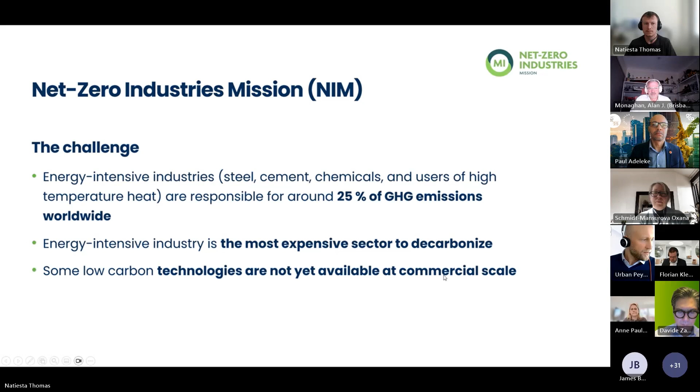One of our main goals is probably better visible on the next slide. If you could move to the next slide, Thomas. You see a summary of our mission goals, but I think what it sums up is that our goal is to build trust in new technologies, and webinars like these are meant to help build that trust.

Our goal, as you can see, is to implement 50 large-scale demos across all energy-intensive industry sectors and along different technology pathways. We support fast-track development of breakthrough low-emission technologies to higher TRLs, and ideally, we help reduce capex on low-emission innovation technologies by over 15%, and that already in the near future.

Today's session will explore the latest developments in net zero cement, highlighting cutting-edge technologies and industry best practices. As Alan has already pointed out, we have an exciting lineup of experts who will share insights into how we can collectively drive sustainable change in the cement sector.

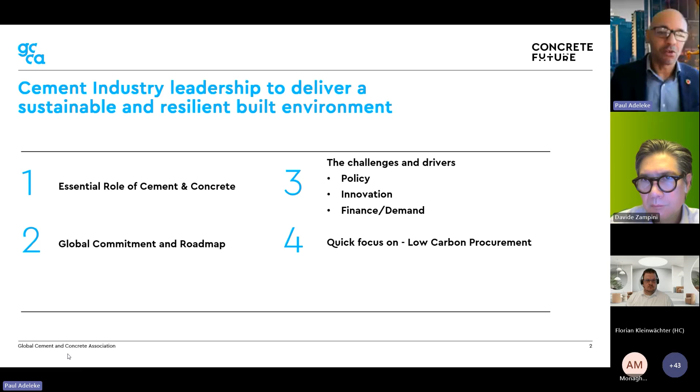So if you don't know about the GCCA, we're a member company organisation, and our members, who manufacture cement and some of them also concrete, operate in just about every country across the planet. It's very much a local product, cement and indeed concrete. You can see all our members there - we have about 50 of them - but we also have a number of association partners: national associations, regional associations, who also work with us hand in glove in driving our messages, working with partners and communities to ensure we can collectively build our vision.

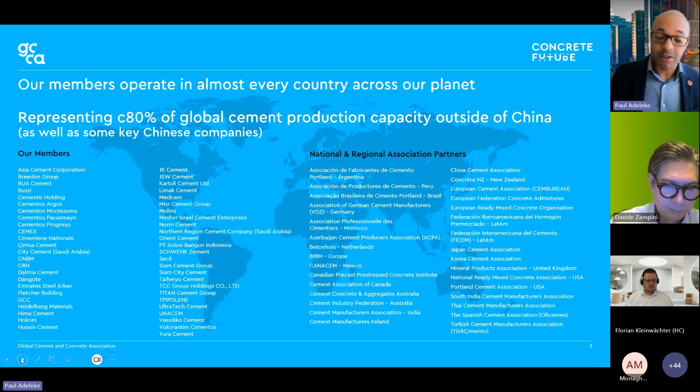We represent around 80% of global cement production outside of China, but an increasing number of China members are also joining the GCCA, which is hugely important. China, you will know, produces more than 50% of both cement and concrete in the world, so it's absolutely crucial that that is part of our mission to decarbonize.

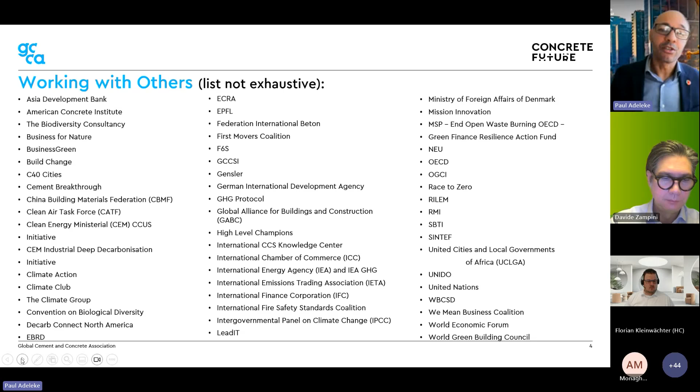We work with many different organizations. Please, if you're not on this list and you do work with us, I apologize. If you're not on this list and you want to work with us, do drop a note. The GCCA exists to partner with organizations - we cannot achieve our net zero mission alone. We need policy, we need finance, we need the built environment, the full value chain playing its role to help us. So that is our job: to collaborate and work with a whole heap of different organizations.

So, the essential role of - when I talk of concrete, I obviously mean cement as well.

There is a balance, why is it a problem? Why could we not just not use cement and concrete? Well, actually, no, we couldn't. We need it for society, for transport, for the hospitals, for the schools that we build, for the houses that we live in, for the offices that we work in. It is a local product. There is nothing with the level of strength, durability, cheapness, versatility to be able to construct. But of course, it comes with a level of impacts.

The whole built environment and construction is around 40% of CO2 emissions, and within that, building materials around 11%. And the figure we use for cement and concrete is something around 7% of CO2 emissions come from cement and concrete.

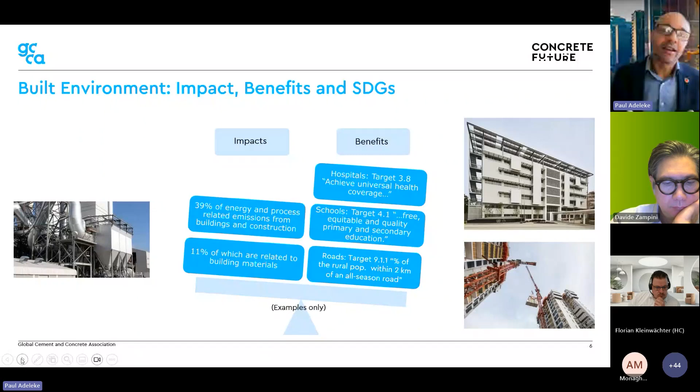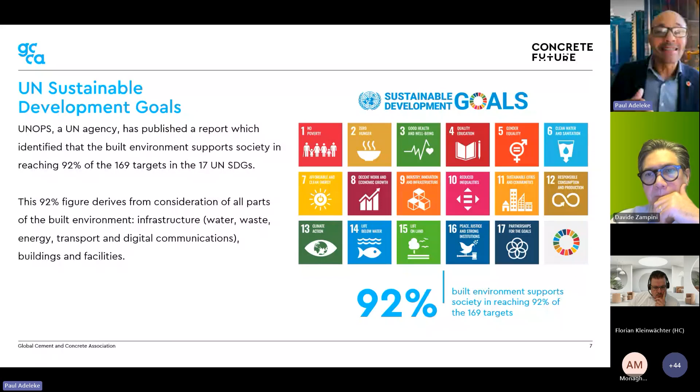But it's that duty that we think our members have, because we deliver this essential material, that we need to decarbonize it. And we're even massively critical for the SDGs, the 17 United Nations SDGs. The estimate figure is that 92% of them need built environment support to deliver them. And the analysis we've done suggests that actually cement and concrete are vital for around half of all the work within each of the SDGs.

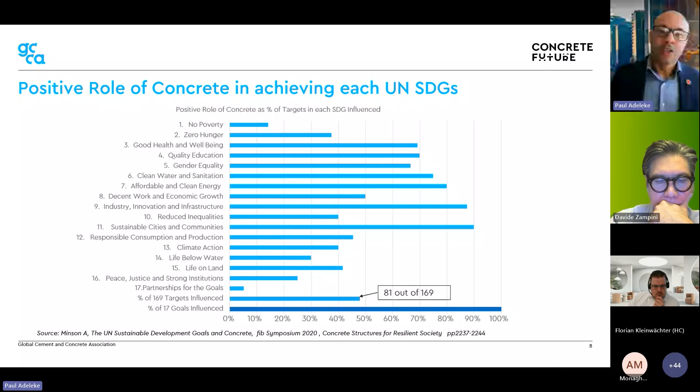But we have to build smarter. We know that as well. We have to be able to recycle our products. We have to encourage architects to use our products with a more minimalistic approach. We have to be able to recycle and reuse the buildings and then the materials that we need. But there's this call to action to our industry from all the stakeholders.

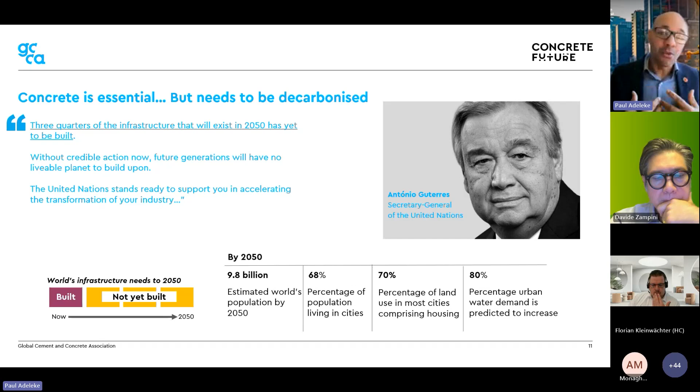And that is why in 2021, our member companies and the industry under the GCCA came together to make this global commitment, to set out a credible pathway to get to net zero. And I believe we're the first global industry to do that.

Now, it's not that work wasn't done to drive down emissions over the previous years. We've said that initial progress from 1990, when we started to monitor CO2 and transparently report it - we're again one of the first industries to do that of our manufacturing. You can look on our website to see that every year we report those figures to show that there was indeed improvements in reduction of CO2 emissions.

But we think that this decade ahead is a crucial decade to deliver, where we have to accelerate those reductions, but also set ourselves up for the end of the decade, where some of the more transformational technologies will come on tap to really drive the reductions forward.

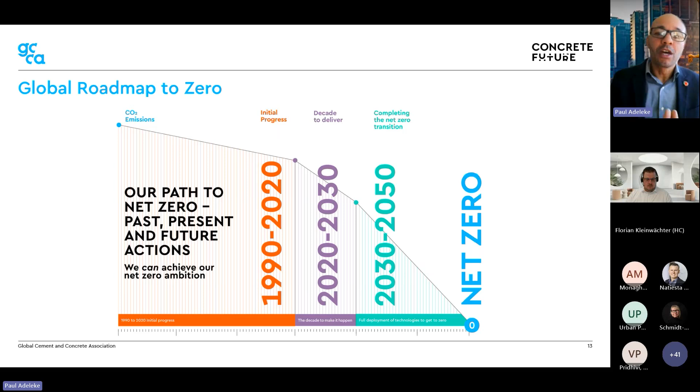At commercial level, carbon capture will start to really come on stream and ramp up towards the end of the decade. It's important to know that the very first at-scale carbon capture cement plant will be live and operational this year, which I think is a really important moment for our sector - the first plant will be making net zero cement.

We've got milestones up to 2030. So by 2030, we want to get to a 20% reduction, 20% in cement, 25% in concrete, and 10 plants that are up and running at scale.

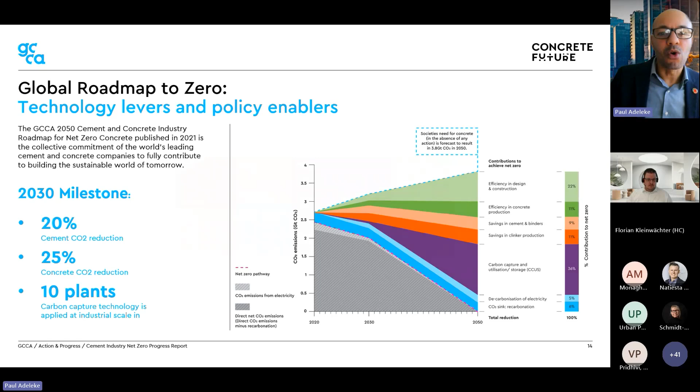We think we're confident that we'll deliver 10 plants and more. I'll leave this slide in so it's a more comprehensive run through of each of the technologies and levers and what each means, but for time I won't go through it.

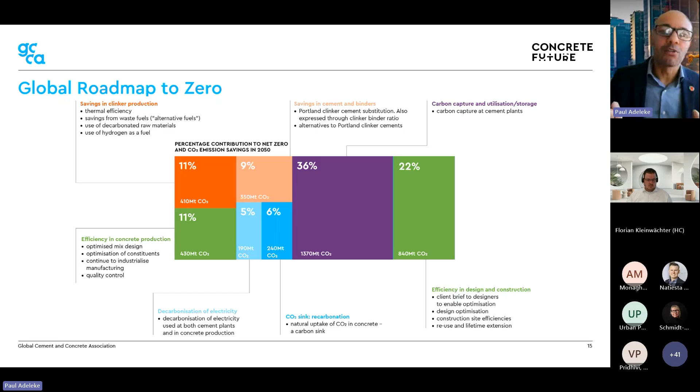Not only is the GCCA involved in the global roadmap, but we also help deliver national roadmaps. We work with a number of national associations, partnering with governments to deliver roadmaps and commitments at a national or regional level. Our ambition is that the whole globe is covered, and we're trying to get to 75% of the globe by the end of the year.

We're making progress, because China have made a commitment to deliver a roadmap, and we're working with the Chinese industry there. The India roadmap is almost complete and ready to be published. Both of those countries have big populations and are big and critical for cement and concrete production.

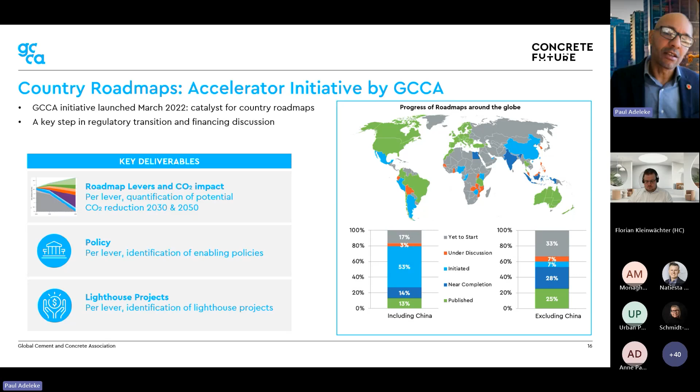We also need to make sure the Global South and Africa plays its role, because it's the Global South where the majority of cement and concrete production is being produced, and even more so as we move through the decades ahead. So it's fundamental that each country does its homework with its national government, and that's what we're moving towards.

In terms of moving forward, we think the key drivers are around policy - the enabling policy frameworks we need to get tangible change - but also the technology and innovation drivers, as well as making sure there is demand for lower carbon cement and concrete.

There's no question that our member companies operating across the world are making progress. Our action and progress report, which you can download, is jam-packed with case studies across all the different technologies, showing a handful of the key work that's been done. I do suggest you download it. We transparently report on that every year.

As we get to the halfway mark of this decade, which we're calling the decade to deliver, we need to accelerate that. So to complement the action and progress on the ground with our member companies, we think greater progress could be achieved with policy support to underpin the transition, driving innovation and technologies, and unlocking the critical demand for low carbon procurement.

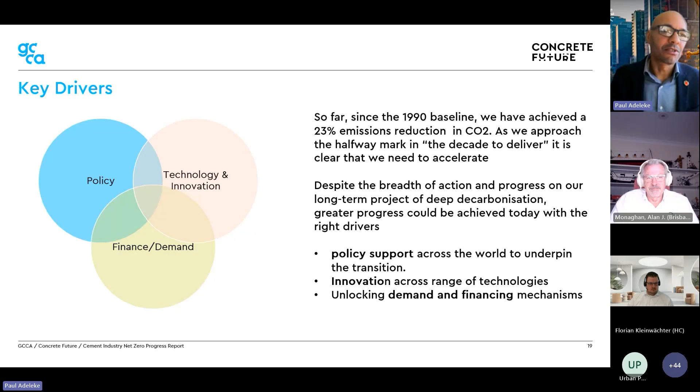For example, if we look at waste treatment, our kilns can take societal waste and recover energy from it, reducing our fossil fuel use. It's a win-win for society - we're taking waste that cannot otherwise be recycled and using it for both energy and within the cement product itself. Some plants are operating at nearly 100% alternative fuels, but we need regulation to allow and deliver that.

We also work with blended lower carbon cements. We're going to need a regulatory base for carbon capture, recognition of carbon removals, and public financing to support that, as well as licensing and building the transport and storage infrastructure.

Ultimately for carbon pricing, we need to put a price on carbon to make sure our member companies can deliver the investment and know they'll retrieve that back. Whilst we advocate for carbon pricing, we need to make sure there is no leakage within that country or region that can distort competition, so that investments can be made with certainty and confidence.

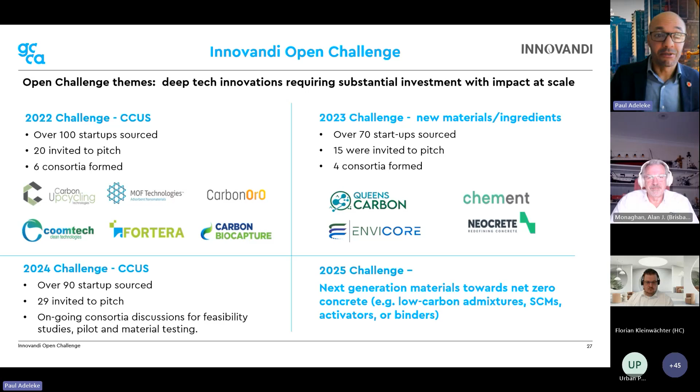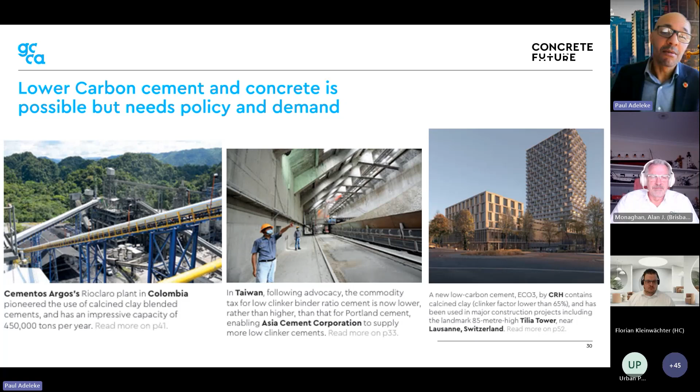And more so, it needs demand. It needs government and private buyers to demand lower carbon products, so that it's actually produced by our members, and they're incentivized to produce and deliver that.

But it means we need tools to be able to measure what is lower carbon cement and concrete. So the GCCA provides an environmental product declaration so that cement, concrete, aggregates, and precast products can be measured, with third-party verification, which really implies deep data collection—an absolutely critical building block.

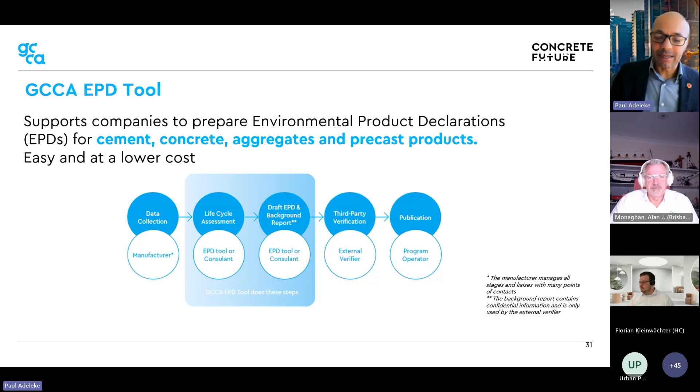Beyond that, to underpin the whole procurement system we're trying to build, you need governmental targets, you need baselines set for every country, and also a definition system which defines what is lower carbon cement and concrete, providing a level of comparison so that those procuring can make informed choices.

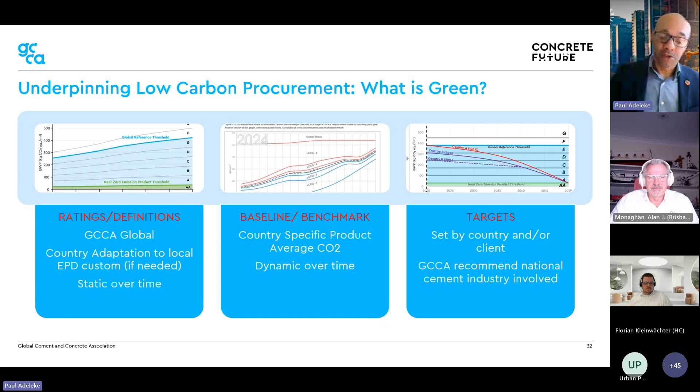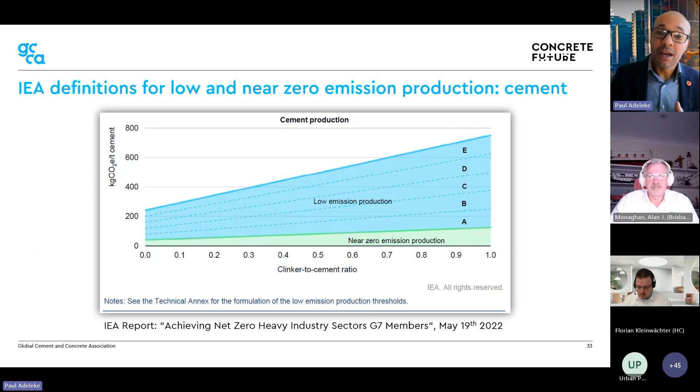The IEA very helpfully provided the definitions for low and near zero emissions cement, and the GCCA has used that as a baseline to produce cement ratings and also concrete ratings.

So we are launching our rating system in April, whereby procurers will be able to ascertain and mark which level of carbon rating is attached to each of the products that they buy. If you want to know more about that, we have a webinar ourselves in March. Just jump on our website and you'll be able to find and hear a little bit more about that. It's a fundamental thing, trying to drive the demand.

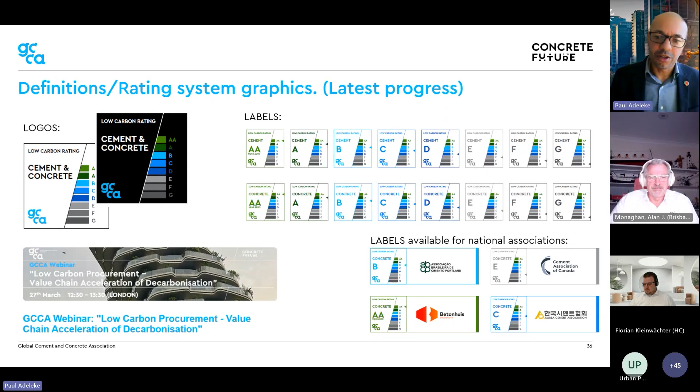One of the things that the GCCA does every year is get together all our CEOs and our member companies and leaders, but also this year we're inviting the wider value chain, the wider built environment and policy makers to join us for our conference in June in Mexico City. If you have the opportunity to do that, for a really deep dive and dialogue on how we can progress this work together, would be very grateful.

I'll stop there. I know the slides are going to be shared. Glad to take questions, and thank you.

Thank you for that, Paul. I never actually fail to be impressed with the work of the GCCA. They are an absolute pillar in our industry.

We don't have a lot of time for questions. You did go a little bit over time, but I will ask one as my prerogative as moderator today. This is obviously cement, an incredibly hard to abate industry. So in your opinion, is full decarbonisation really achievable?

It's a very good question. You know, we used to be impossible to abate, hard to abate. We're complex to abate, no question. You've seen that, you've seen the levers. You know that it's not just around the energy, but it's around the processing emissions. We're possible to abate, definitely, but also we're essential to abate because of our necessity to society.

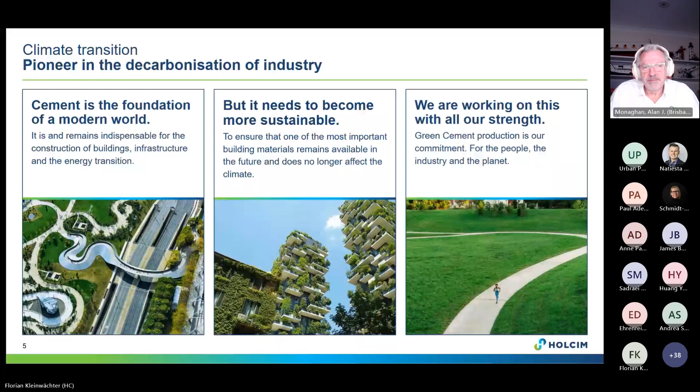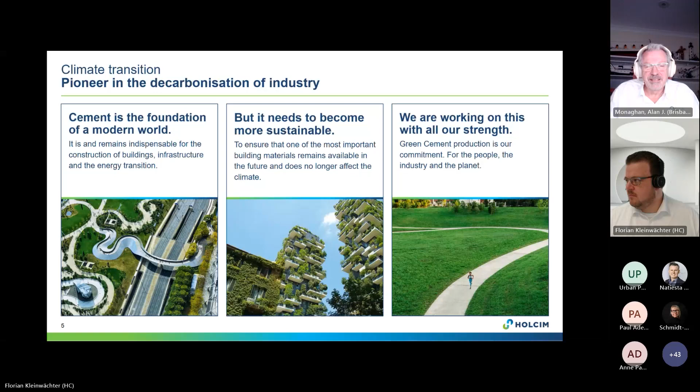Can you hear me? Yes, we can hear you. Florian seems to be having some small technical difficulties there - just give him a second. Florian, are you back? Unfortunately, we cannot always guarantee that we don't have technical difficulties. Florian, we can see you and we can see your slides. Maybe move to the next presentation and come back to Florian. Florian is still on camera though, if you can hear us. He has jumped off - oh, apologies, we will come back to Florian's presentation and questions you will have.

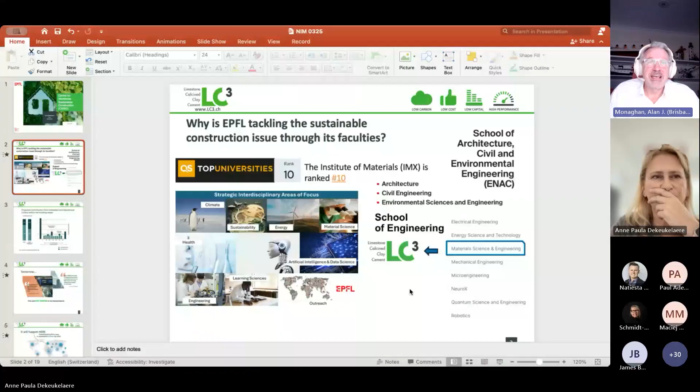Yes, thank you. Thank you so much, and thank you for the invitation. I will walk you through a new cement, the LC3, but let's begin. Do you see well on my screen, correct? Absolutely, yes. Okay, thank you.

So first of all, before talking about LC3, I'll just quickly talk about the university, who we are. We are EPFL, the Polytechnic Federal University of Switzerland in Lausanne. Within the university we have three faculties: architecture, civil engineering, and environmental engineering. So we are covering in the university all the elements of the built environment, from civil engineering, material engineering, to architecture. That's why the ambition of the university is really to tackle sustainable construction as a whole and as a big value chain. So that's where, somehow in the material science and engineering lab, LC3 was invented.

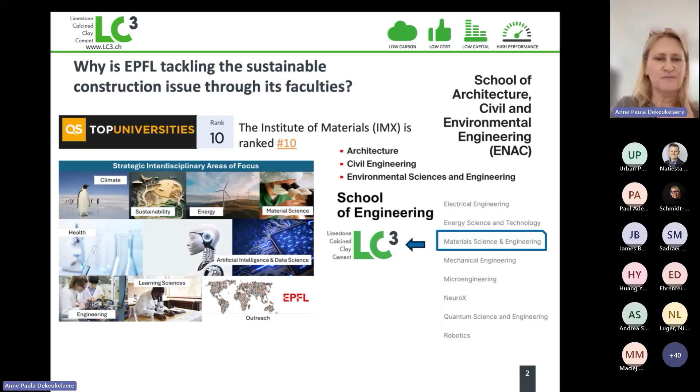It was in 2013. The LC3 cement went out of the lab into the industry in 2018, and here we now are in 2025 already. So I will go through some of the elements.

So just to come back - I know Paul and the others already set the stage - but why is it urgent to decarbonize the built environment, especially building materials? It's because embodied carbon emissions are upfront, meaning those are the emissions that happen at the beginning of any project. Before, we saw that operational emissions were higher than embodied emissions, but for the future, since the whole built environment growth will happen in the Global South, we think embodied emissions will have a higher percentage compared to overall built environment emissions. That's why it's important to tackle it now, and we have maybe one decade to really change the path quickly.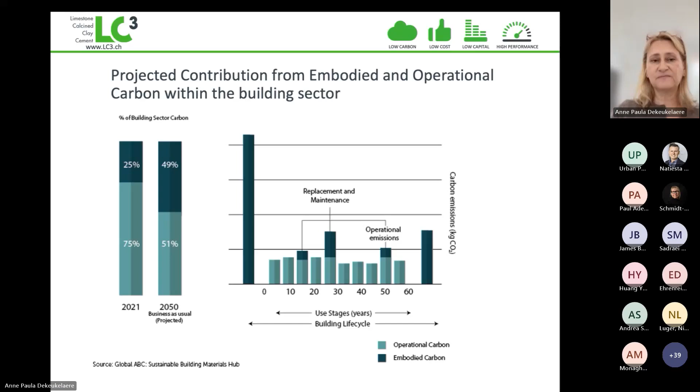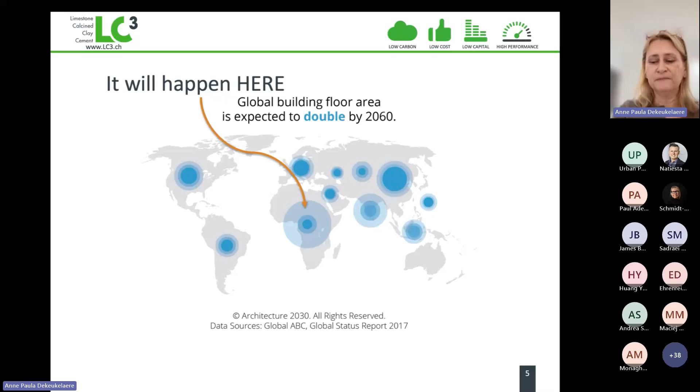I think that was also already mentioned, that 3/4 of the infrastructure that will exist in 2050 has yet to be built, and that we expect one New York City every month until 2060. And what we know is that this will not happen in the Global North, but in the Global South, and especially we think it will happen even more in Africa. That's where the whole development will happen, the whole infrastructure, the whole building, residential, and all this will happen even more in Africa.

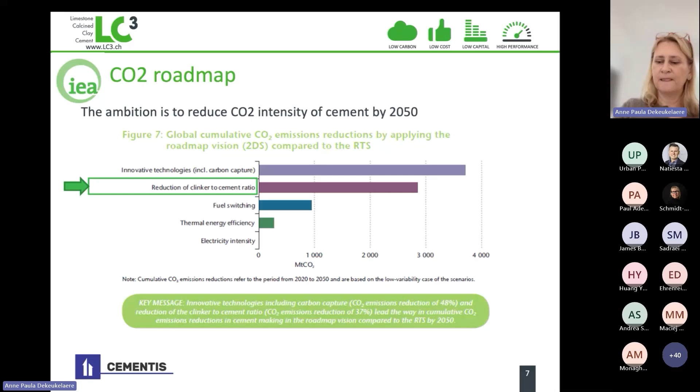So I will show you here two different roadmaps. One from IEA, where they also emphasize that part of the lever to decarbonize is the reduction of clinker to cement ratio. So the reduction of clinker into the cement, as Paul said, is the element that has the highest CO2 intensity. I will also show you the GCCA roadmap, where the line savings in cement and binders is where the clinker factor will have to decrease and be replaced by other materials. So what does that mean?

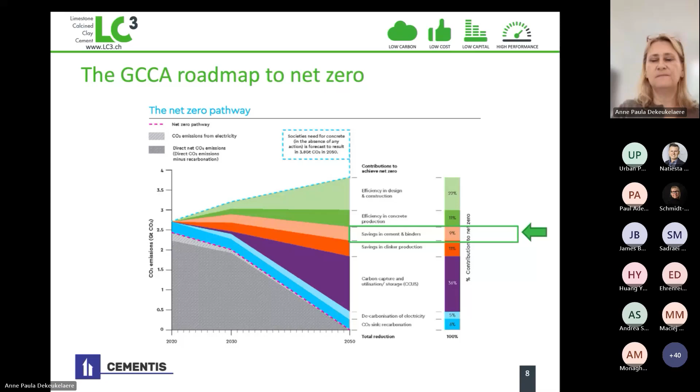Yes, LC3 first. What is LC3? In fact, it's very easy. On the left side is the ordinary Portland cement, which is the oldest cement recipe that we have, where 95% was clinker. The new LC3 replaces 40% of this clinker with calcined clay and limestone. What's happening is that calcined clay has no chemical CO2 inside, so we only have CO2 from fuel combustion. We only need to calcine the clay until 850 degrees C versus 1450 C for limestone. And we add 15% limestone, which is zero CO2 because we don't have to heat it up. So we made this formula which reduced the overall emissions by 40%, which is quite massive.

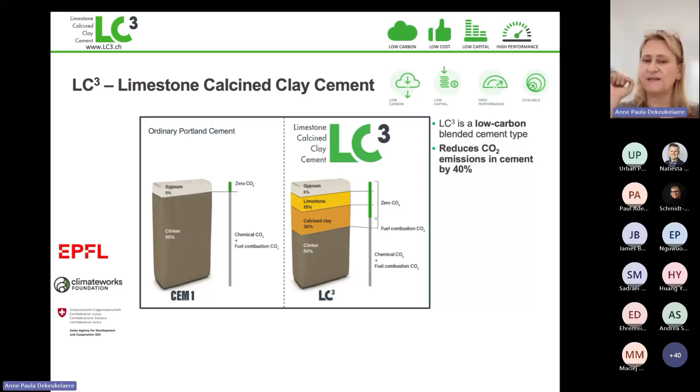So let's go back one step and say, okay, what would be the supplementary cementitious material that could replace clinker? We have different elements. We have limestone. Limestone is in the recipe of LC3, but limestone alone will not provide additional strength, which means you may add limestone to your cement recipe, but only to a certain percentage. Over that, your strength will decrease.

Second option would be fly ash. Fly ash is generated from coal-fired furnaces. And we know that coal-fired power plants are set to decrease in the future, so the availability and the quantity of this waste will decrease and will disappear one day.

Then we had also slag. Slag was, and is still, a very good cementitious material. It's a waste from the blast furnace. The issue is that the volume on Earth is already used. We expect the overall volume of slag to reduce because the steel industry will go from blast furnaces to electric arc furnaces, so that will reduce the slag.

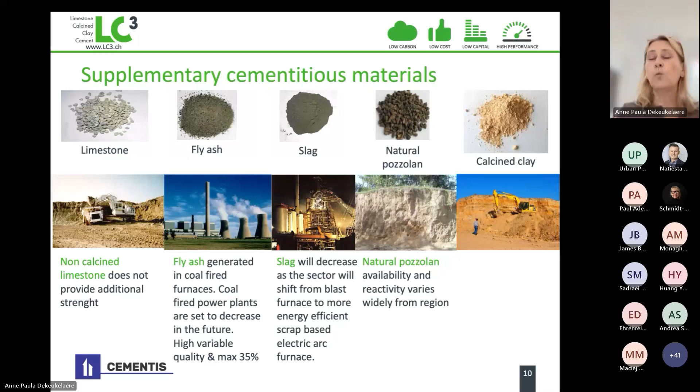We also have natural pozzolan, some of which are reactive and some not, but it varies widely from region to region, so we don't have availability of this resource everywhere in the world. It depends. And then we have calcined clay. We looked at calcined clay as a resource that is available worldwide in huge quantities.

Just to show the availability of SCM worldwide in terms of quantities, you see slag is used nearly at 95% worldwide, and there is a certain quantity available. Fly ash is available, and we also use much of it, but there is a lot of different qualities in fly ash. Then you have Portland cement, that's a huge volume, and we have the two elements, limestone and calcined clay, that are extremely available worldwide. So availability is not the issue.

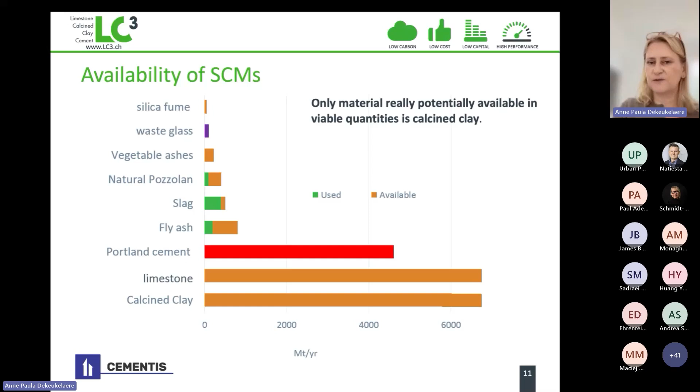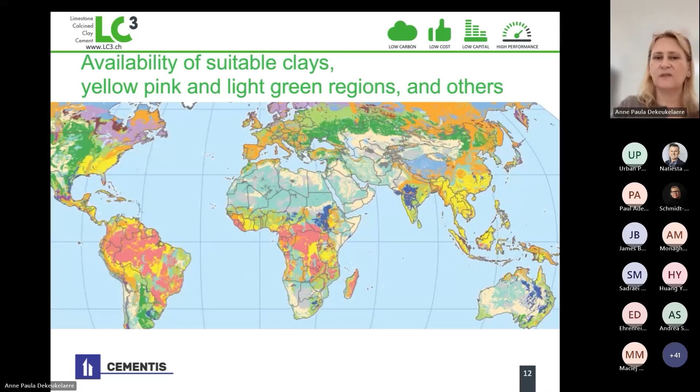Let's come back to the recipe. As I said, 50% clinker, 30% calcined clay that has to be calcined at 850 degrees C, which means yes, we need a calciner. I will come back to that. 15% limestone, 5% gypsum. With this, we have 50%, let's say 45% less clinker, 40% less CO2. We have similar strength as ordinary Portland cement, and we even have better chloride resistance and alkali silica resistance.

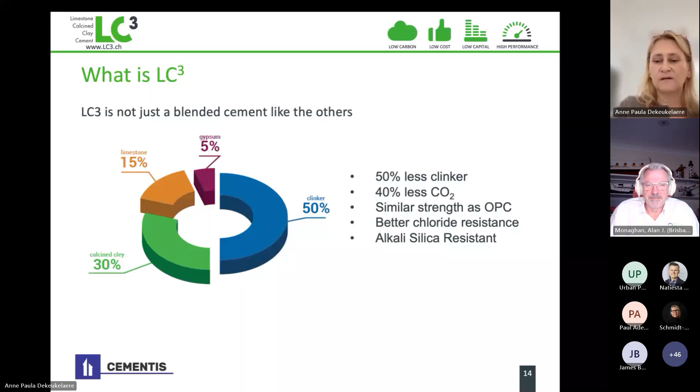So it's a product with much lower CO2 and the same or even better properties than the original recipe. This was to compare the strength development of OPC and LC3 with 50% clinker. We really have nearly no differences, which means that we can use LC3 very quickly and change any cement by LC3 and use it like any other cement.

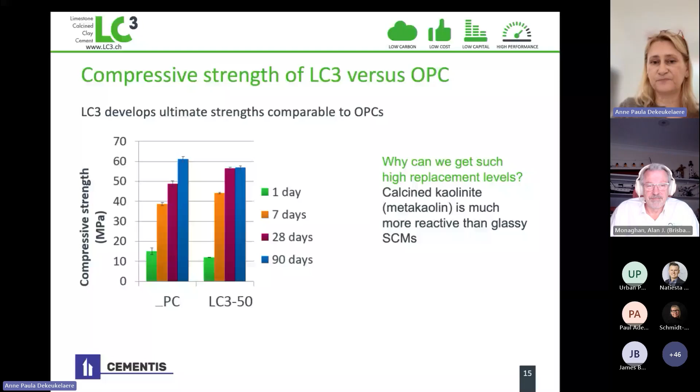That was really the positive side. 2014 versus 2024: in 2014, when the product was still in the lab, they did 2 houses with LC3 in India, on the left side. Since then, on the right side, you may see it has improved a lot. Argos in Colombia has taken it up very quickly, building bridges, highways, commercial centers. In Switzerland, we have the Tilia Tower on the left side, 27 floors with LC3, and the Rolex campus just announced to build the whole campus also with LC3, which we are very proud of.

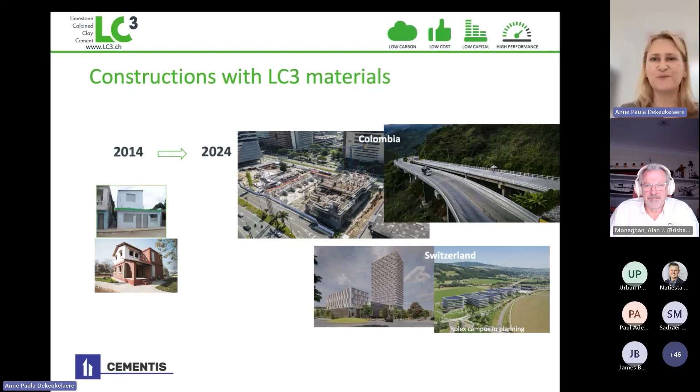Where are we? Projects are popping up quickly worldwide, and as Paul said, it's coming to the global south. Because it's implemented very quickly, there's an investment cost because of the calciner - you can either convert your clinker kiln into a calciner kiln, or buy a new kiln, and that's the investment. But it's not a huge investment - the return on investment is maximum 5 years.

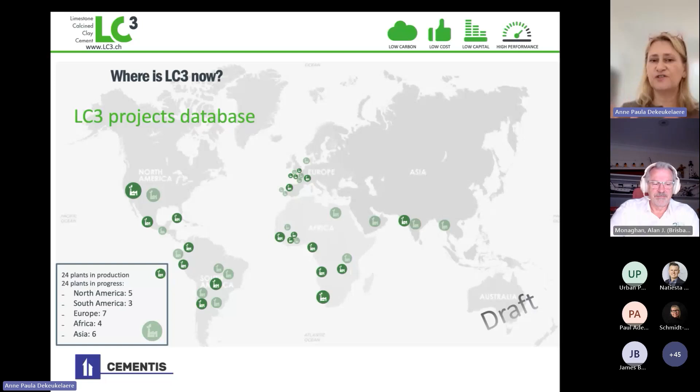Additionally, producing LC3 costs on average 25% less than OPC. That's why we see a lot of projects emerging. We even did the calculation, which means that until 2025, 13 million tons of calcined clay capacity will be in place. Depending on the calculation we do, this means between 8 and 15 million tons of CO2 reduced per year, which is massive - that's on average 25% of Switzerland as a country's emissions.

Let me come back if I didn't forget. Yes, you have the CapEx, and that may be somehow what the cement industry may be more cautious to enter - there is an upfront CapEx requirement in order to begin to produce this calcined clay and produce this new cement. But the result is quite significant - 40% is huge.

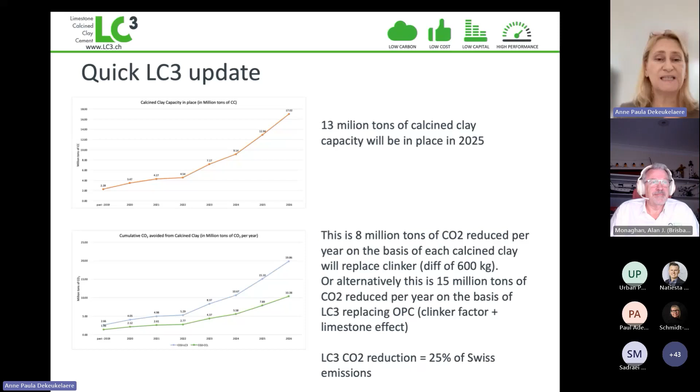What we are missing maybe is - I know a lot of big cement producers like Holcim, CEMEX, Argos, Heidelberg are entering. What we would love is that every cement producer begin to investigate this and make the step of investing in a calciner, begin producing LC3, and go away from OPC, and build what we need to build. Right, hope it's clear. Thank you.

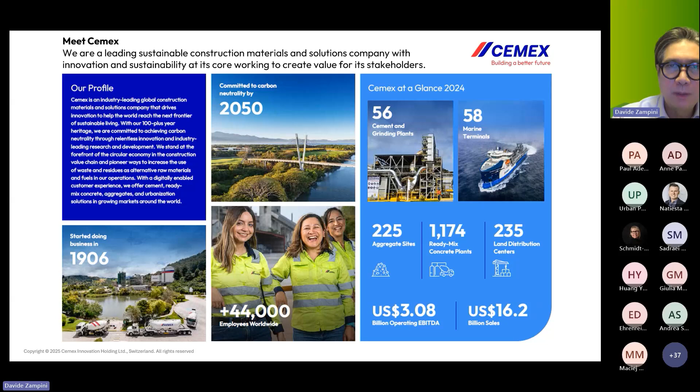So solar clinker. When we talk about solar clinker, we're effectively talking about how do we harness solar radiation and use that to drive the entire clinker production process. The first part of my presentation will focus on the technology, and when we talk about solar radiation or solar-driven manufacturing processes, we're specifically talking about concentrated solar thermal power.

How to harness the energy in the sun's rays and literally take it to drive a process through heat. I hope I'm going to be able to convince you that concentrated solar thermal power is actually child's play.

But what is concentrated solar thermal power in essence? In very high level, simple terms, you have the sun emitting rays, and those rays of sunlight are focused and concentrated through heliostats, which are basically mirrors designed in a very specific way so they're able to take the sun's rays and focus them, concentrating them into a receiver in this particular case. That heat is then used to drive a thermal process, which either moves a turbine or generator and then produces electricity. So that's in very simple terms.

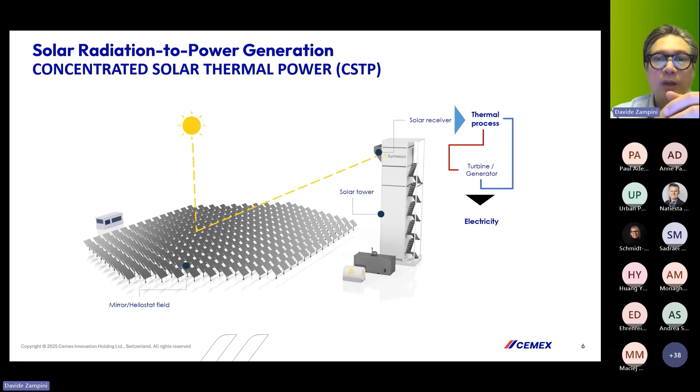In fact, if you go back to March 2007, there was the very first commercial solar power plant, solar radiation power plant, the PS10 Planta Solar 10, that was in Andalusia in Spain. It really marked the beginning of the large-scale development of this sector for harnessing solar energy.

But what caught our attention, at least from the CEMEX side, is that there's a startup or spinoff from ETH in Switzerland called Synhelion, and we were researching this information.

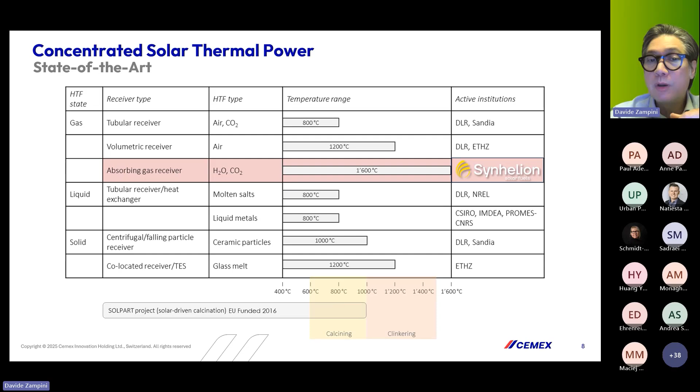We'd already participated in an EU project called Solpart, focusing on harnessing solar radiation to drive clinker manufacturing, and they reached 1,000 degrees. But the Synhelion guys came up with a technology that actually reached 1,600 degrees, which becomes very relevant when talking about clinker manufacturing.

So a few words about the guys from Synhelion, because we are actually partnering with them. They were born as a company with the objective to produce solar fuels, using a process that harnesses solar radiation to combine CO2 and water. They have a very clear roadmap towards net zero, and they're working with important airlines worldwide to produce sustainable aviation fuel, SAF.

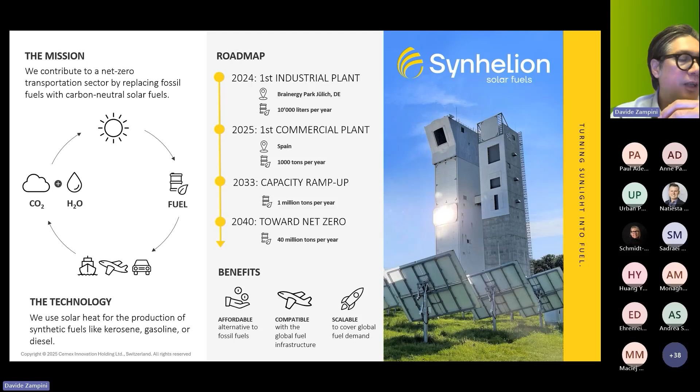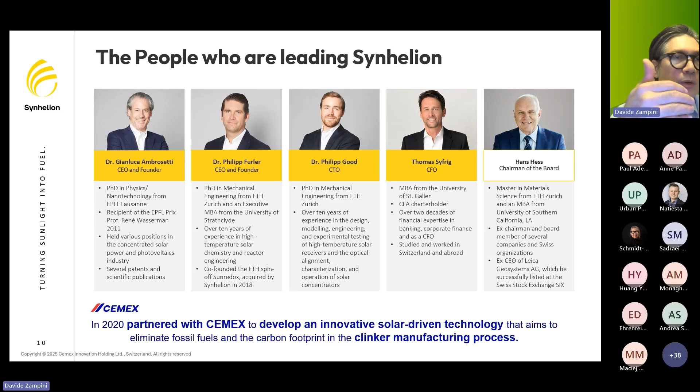So this is the team. Once you have the slide, you can go and check out these guys. They're very bright people, and we were very excited to have this opportunity to team up with them. So we decided to partner with them in 2020 to explore what it means to use solar radiation to drive the entire clinker manufacturing process.

Now, what is under the technology know-how of Synhelion? They have 4 proprietary innovations. One is the solar receiver, which is key. It's the unique and only solar receiver today that can take gas temperatures up to 1,600 degrees. And 1,600 degrees is very important because that's exactly the temperature you need to drive the clinkering process in the furnace, in the kilns where we manufacture clinker.

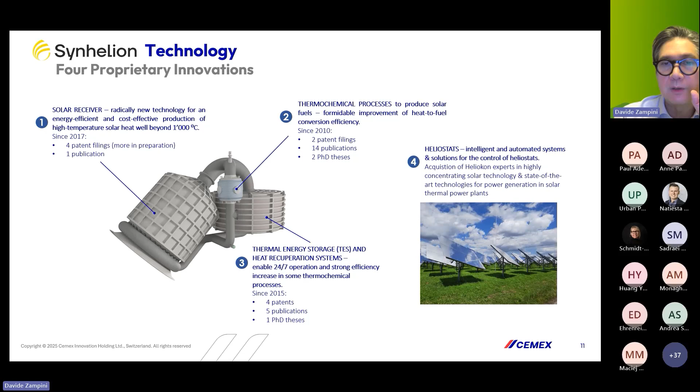They also have thermochemical processes to take the CO2 and water and produce the fuels, with proprietary technology there. An essential part of this is how to store that energy, so thermal storage is also something they have considerable knowledge on. They also own a company that produces heliostats, and all the technology required to control the heliostats, the mirrors that focus the sun's rays.

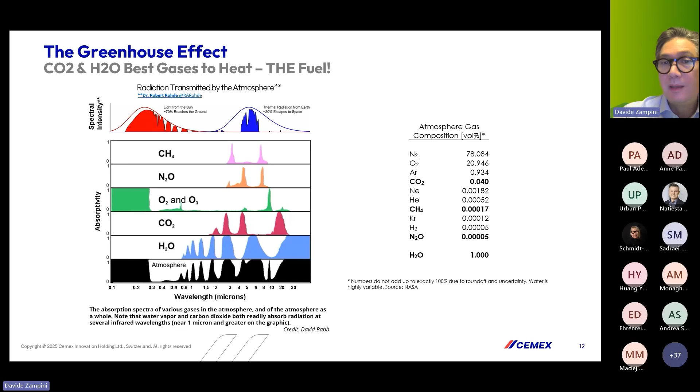What's really interesting and ironic in some ways is that what the Synhelion guys are heating up in their receiver to 1,600 degrees is CO2 and water vapor - the greenhouse gases heating our atmosphere, because those are the easiest and best at absorbing heat. If you look at the spectrum of absorptivity, you can see CO2 and water vapor are the ones absorbing the heat.

So basically you can incorporate mixtures of CO2 and water vapor in the solar receiver as the heat transfer fluid. The proprietary solar receiver from Synhelion is able to reach very high temperatures - 1,000, 1,500 degrees - with great efficiency, over 80%, even at a moderate solar concentration.

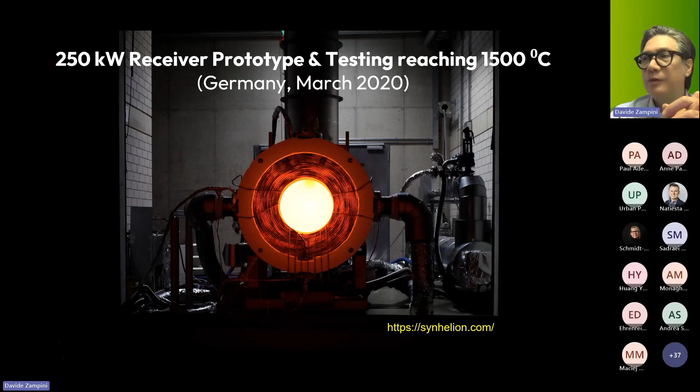In March 2020, coincidentally when we started knocking on their doors, they were able to create a first prototype - a 250 kilowatt receiver prototype - tested it in Germany, and showed that it was really possible to reach 1,500 degrees C.

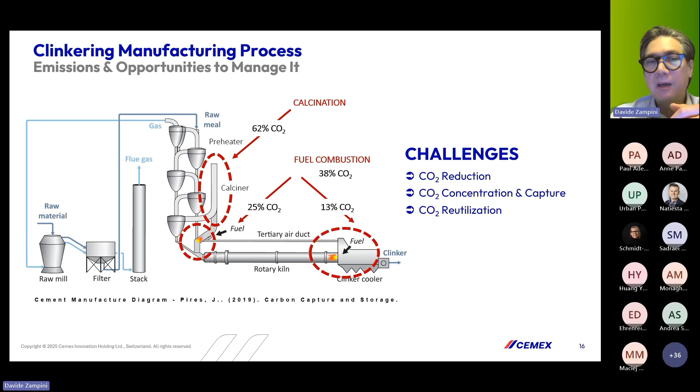So now the question is, we saw this and said, how can we apply this to the manufacturing of clinker? It's important to keep in mind that CO2 emissions come from the fuel, and from the chemical process of decarbonating the limestone, which is the source of calcium we need to manufacture clinker. These two points are very critical in terms of CO2 emissions.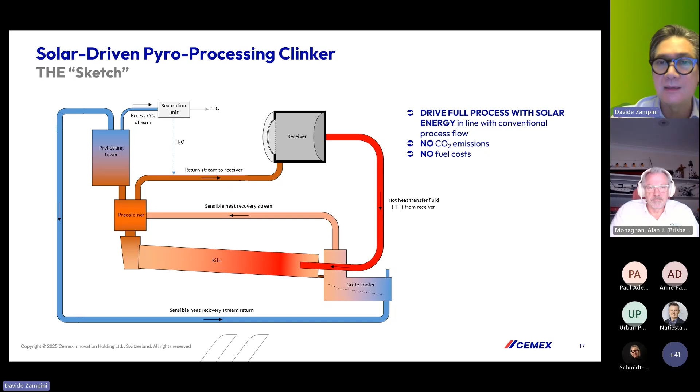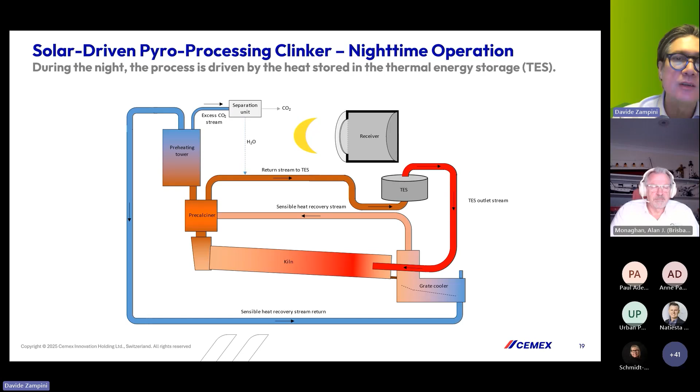And of course, you could harness the heat from the sun, drive the process, and also use the thermal energy storage unit to store the energy, and then take that energy when you don't have the sunlight, at night for example, and drive the process despite the fact that we don't have any sunlight during that moment.

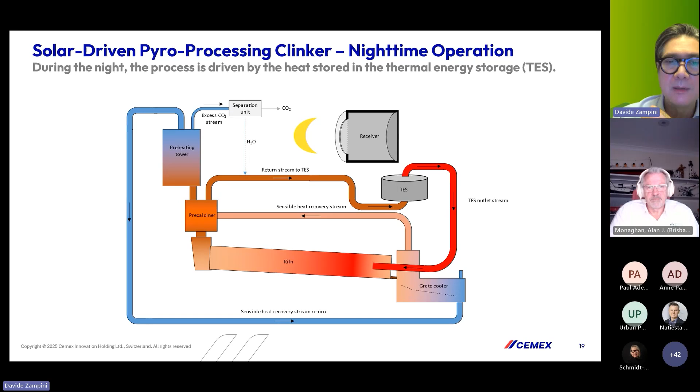Before we got deeper into the subject matter, we conducted a feasibility study with the folks from Synhelion, and there were many critical aspects we addressed, like dimensioning the solar field, the thermochemistry of the clinker, which we'll come back to in a moment, because it's not given that if we're burning certain types of fuels right now, call them alternative fuels, natural gas, fossil fuels and whatnot, the characteristics of the fuel we burn can affect the clinker chemistry. So we had to check that, how to transport that heat, and many other aspects. The feasibility study was highly encouraging, because in the end the conclusion was that this is something that can really happen and that we can pursue, both from a technical point of view and from an economical point of view.

So again, in the end we saw some very exciting opportunities, and the outlook was very positive when we started to look at this. So this is kind of to recap a little bit.

You have basically the sun coming in, a bunch of mirrors focusing the sun rays into a solar receiver that is proprietary and unique, that can take the gases up to 1,500 degrees, produce the clinker, take part of that CO2, produce the clinker, and because of the temperatures, heat up the limestone, concentrate further CO2 into the gases, and then separate through a very easy process of condensation, take part of the CO2, put it back into the system, and part of the CO2, in this particular case, we have a use for because Synhelion happens to be interested in the CO2 for producing sustainable aviation fuel.

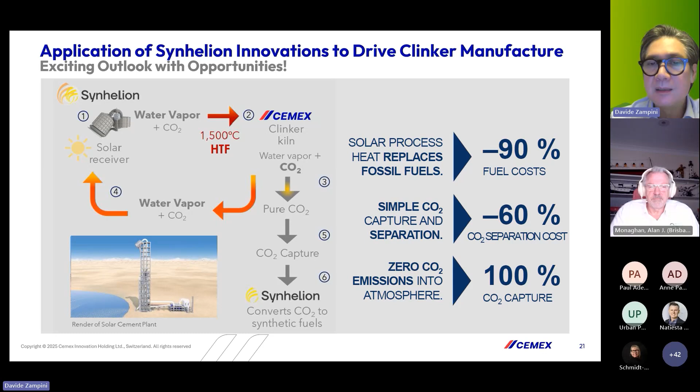But you can see the numbers there now. We can replace up to 90% of the fuel cost, reduce the fuel cost by 90%. We can separate at a cost that's 60% less than we would with carbon capture. And I think we could capture 100% of the CO2.

So the question then is, okay, we have all the ideas, the feasibility study shows that we could do it. So we had to find a lab and a place to actually test the concept. So we actually went to IMDEA. It's a concentrated solar thermal testing facility, and you can see the characteristics of this facility.

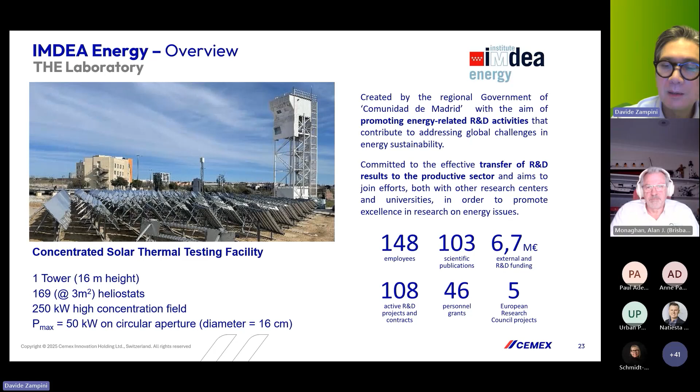IMDEA is actually a research institute focusing on energy-related technologies. Luckily, the Synhelion guys already had an agreement to run some previous tests, and we had the opportunity to really test and evaluate a small pilot. One of the key focuses of the pilot was, as I was saying before, to see what would be the impact of the different mixtures of CO2 and water vapor on the clinkering process and the calcination process.

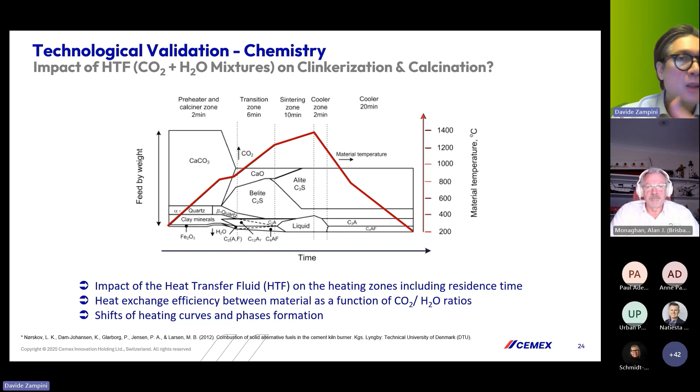Would it be the same, or would we completely alter the way we achieve clinker? Are we going to change the chemistry, and what would the heating curves be? When would the phases form? So many questions, right? Without going into details, basically we tested in the lab.

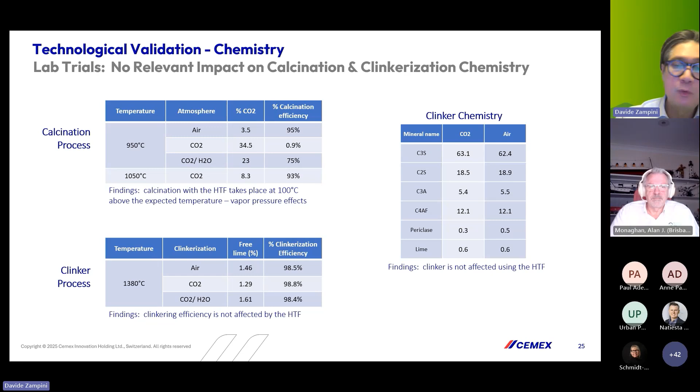We simulated mixtures of H2O and CO2 vapor, and took that up to 1,380 degrees to see how it would affect the calcination process. Because the CO2 is in the gas, we have a vapor phase effect, so we do increase slightly the temperature of calcination, but that's not a big deal. We looked at the clinker chemistry and we're very satisfied, with a perfect match to what we'd normally produce in a regular cement plant burning other types of fuels.

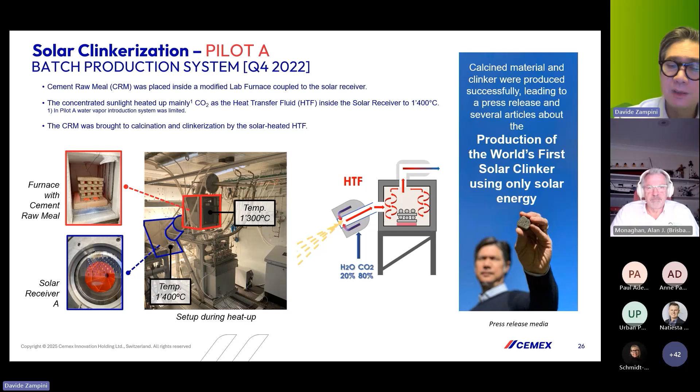So then we ran a small pilot at IMDEA. The first pilot was a batch process. Basically we took the raw materials, put them in a furnace, and blasted it at 1,400 degrees using solar radiation. We produced the first solar clinker back in Q4 2022. A couple months later, we said let's demonstrate that we can produce the solar clinker in a continuous way, so we set up a continuous moving bed, vertical configuration.

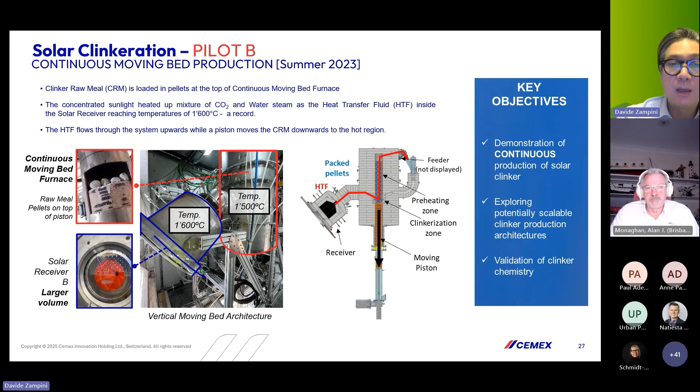This also speaks to the fact that the production of clinker can be revisited. Maybe you don't have to use the conventional kiln we're using today, but a different way of heating up materials. In this second pilot, we were able to produce clinker continuously and achieve the clinker chemistry, as shown here, with a documented temperature profile showing the clinkering zone and calcination zone. In the end, we can produce a solar clinker continuously while complying with the clinker chemistry we need.

So this is all very promising, and it shows we're step by step de-risking the technology. So what is the roadmap? In 2022, we had proof of concept, and in 2023 we demonstrated that we can produce continuously.

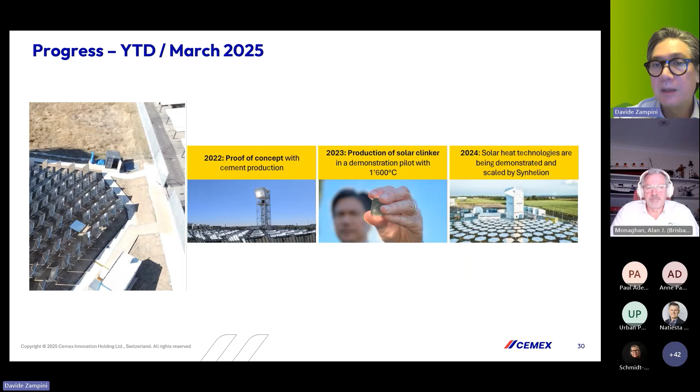The guys from Synhelion are already scaling up, which is also very promising for us, scaling up the technology to produce sustainable aviation fuel, and they've been demonstrating that daily since starting in 2024. So I think the roadmap is quite promising.

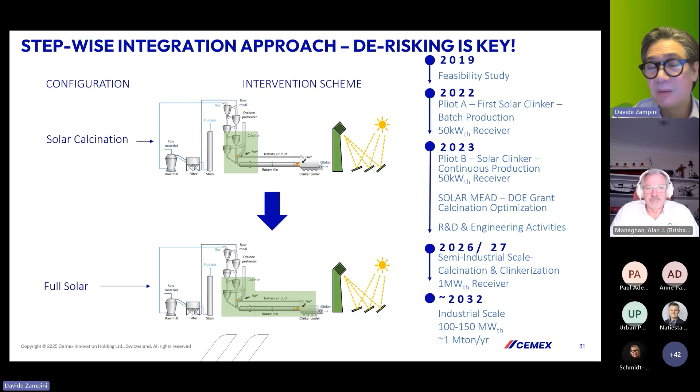We're looking to see, around 2026, 2027, if we can run a larger semi-industrial scale calcination or clinkering trial. Then, hopefully by 2032 or mid-2030s, roughly around that time, we'll even be able to scale up to a much larger setup.

So the technology is able to achieve the required temperatures in continuous operation. Talking to the Synhelion guys, we can offer the lowest cost of any renewable energy source, and it's a seamless way to capture and concentrate the CO2 from the calcination process. But of course, there's the big challenge that it requires a sizable footprint.

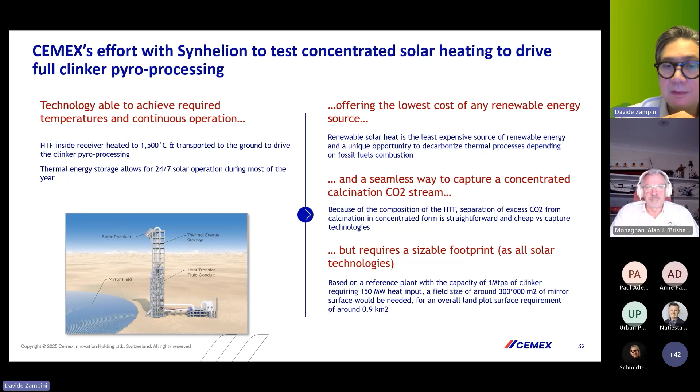You need a huge field, almost a kilometer square, to produce a certain amount of energy to produce the clinker.

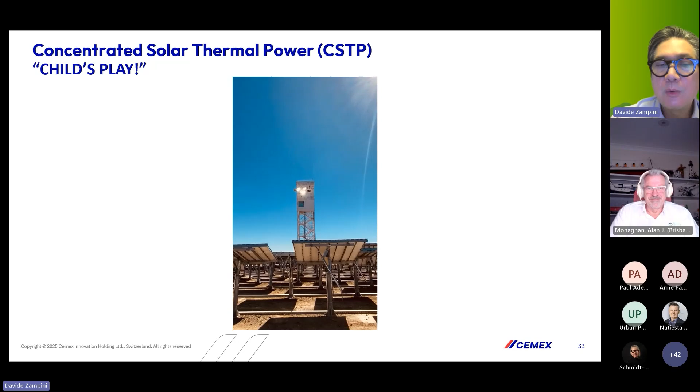So I'm going to end with this video showing that concentrated solar thermal power is child's play. You can see in this video how we're actually in the process. When we start up the whole process, we use the mirrors, and you can see the rays of light, as you would with a magnifying glass as a child. We're taking that heat, concentrating it into the receiver, and starting the heat-up process.

Anyways, I just want to mention, since Paul did bring up the GCCA, that at CEMEX we're working on innovation on different fronts. We're actively supporting startups, either through the GCCA Open Challenge or through our CEMEX Ventures group. We have our own R&D facility, capabilities, and resources, but we're also collaborating with other industries through the GCCA. In the Innovandi Research network, we have a number of topics we're addressing, as shown in this slide.

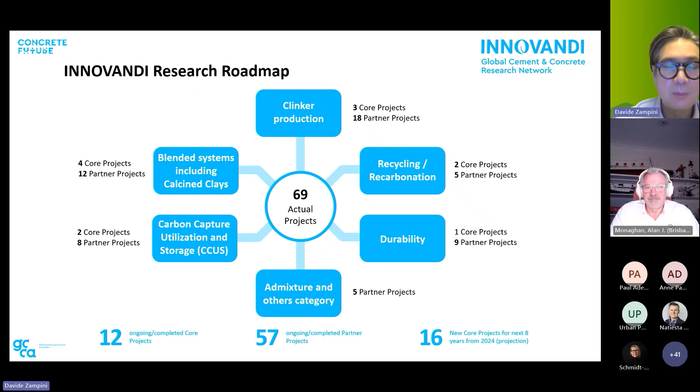Excellent, thank you Davide. I do have one question for you. Would you be able to highlight for us what are the key elements that will accelerate the development of this technology and bring it up to full scale?

Yeah, I think as I highlighted, what has really been key and what we've been trying to do is stepwise de-risking, showing how everything related to this technology can really lead to a series production of clinker manufacturing.

I think the scale-up is going to require drive from the industry and important funding schemes that see to it that we can really bring this to the next level. So I think funding, the de-risking work we're doing, and really creating the credibility that there is a very solid technology behind it can help decarbonize the industry.

Excellent, thank you. I don't see any more questions specifically for you. We do have some time though to ask some questions. There's a question from earlier.

If everyone, I'll just draw your attention to the Q&A section - the questions have been answered both by Paul and Anne in the comments, but there is a question I don't think we've had an answer to yet, from Sajade: which is more cost efficient for decarbonisation, hydrogen as a fuel or using carbon capture technology after the fact? Now, I don't know that there's an exact answer for this yet, but I'm happy for any of our panelists to offer a suggestion.